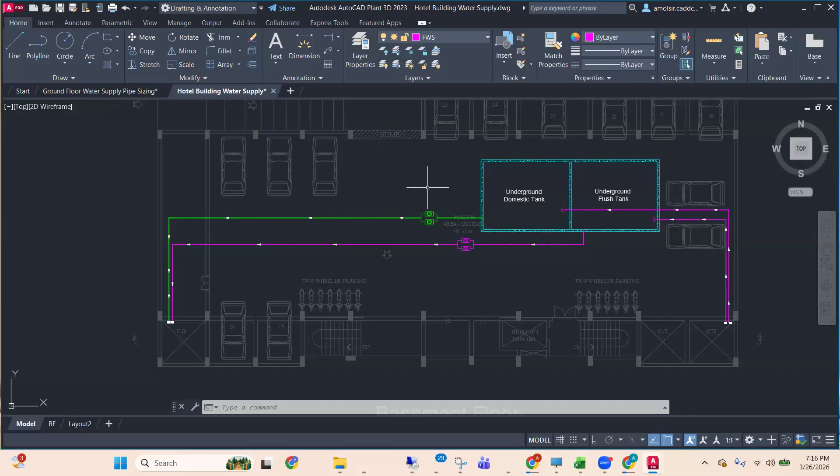Up to now, we have created an underground domestic tank, then an underground flush tank, and accordingly we have created the connections through them. You can see we have created the layers accordingly, like fresh water supply, then hot water supply. All layers were created, and this was already explained in recordings, but I'm giving a brief intro. Next, we have covered how we are able to attach the pumps, and we have also provided the direction of water, like how the water will be transferred. From the ground floor, the water will be coming from STP and municipal bore well, and accordingly it will be supplied.

At the basement, we have the underground domestic water tank and underground flush water tank. I have already shown you the sizes after the single line diagram, and mostly we have created the pipe sizing over here, like for the shower, we have seen 20 pipe sizing was created. We have created the piping accordingly. So instead of running all these systems, you have to create a system for flush water supply and accordingly for the remaining pattern. You have to create the pipe thicknesses accordingly and show the layers.

Someone asked how we are creating the pipe thickness over here. First of all, we have already created the line diagram. If you measure the distance, meaning the thickness of this pipe, it is 20 mm. So how are we creating a 20 pipe? Suppose this is a line I am having, I will take a straight line.

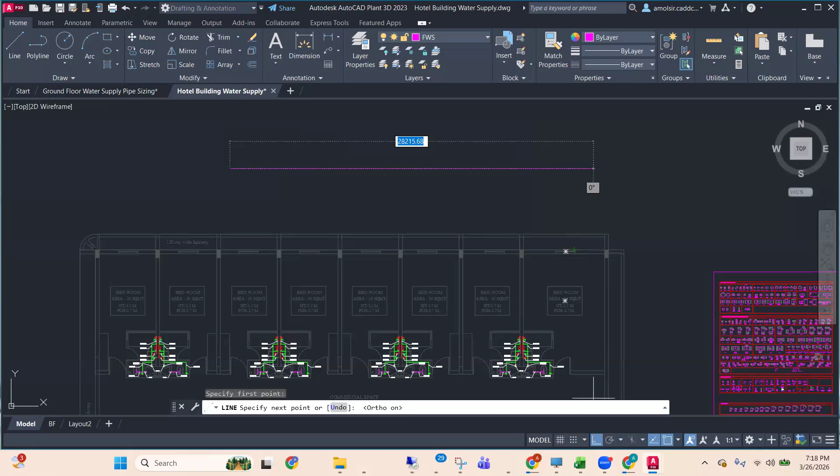I have to create a 20 thick pipe around it. Using the offset command, O enter, I will give 10 offset on this side and 10 on this side. So total 20 - if you measure the distance, it should show total 20.

So like this, you would be creating the pipe thicknesses, and here we have just placed the fixtures over there. We already had a list of fixtures, and I have already shown you how we can place the fixtures and what is the method of placing them. That we have already seen.

Same way, we have placed the shower system over here, and accordingly the valves were placed over here. That is the important step we're having, and you have to place the components accordingly here, doing the dimensioning accordingly.

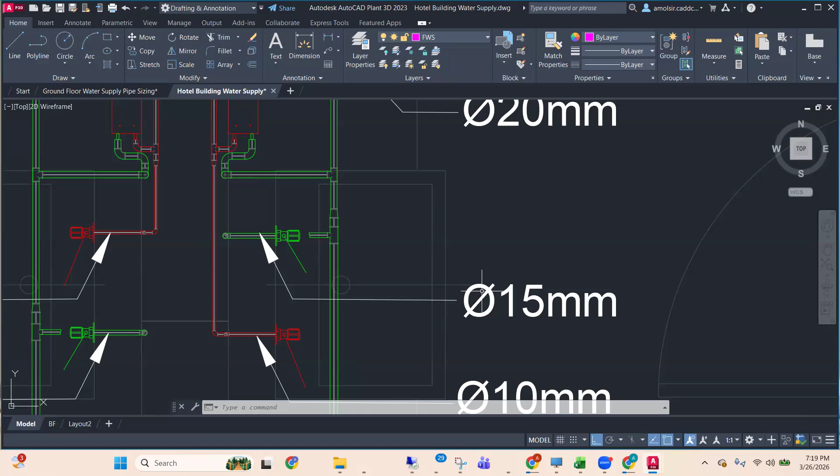Like suppose I am selecting this pipe, so what is the diameter for this pipe? The diameter is 15, this is the diameter symbol. You can just copy this symbol from the internet and paste it over here. Just Google it, copy the symbol and paste it here so that the symbol gets copied accordingly. Like this, a system of network you have to generate accordingly.

So this is the important part we are having over here, like how we are placing the components over here. Up to here, if anyone has any queries, please ask.

Yeah, hi, good evening. Sorry sir, I've just joined late. So you recall the last session? Yeah, anything new? I have just explained from the last session what we have covered over here.

We have created the basement section over here. We have started already from basement, then ground floor. Then the water supply lines will be shown, municipality borewell. Then accordingly you can see it's going to bottom, and it is the thickness of pipe that we are showing over here. This is the picture that we are showing for placement.

So this is a block we are having. You can see a list of blocks I have already given. All the blocks have been given over here with their dimensions. This has already been shared with you.

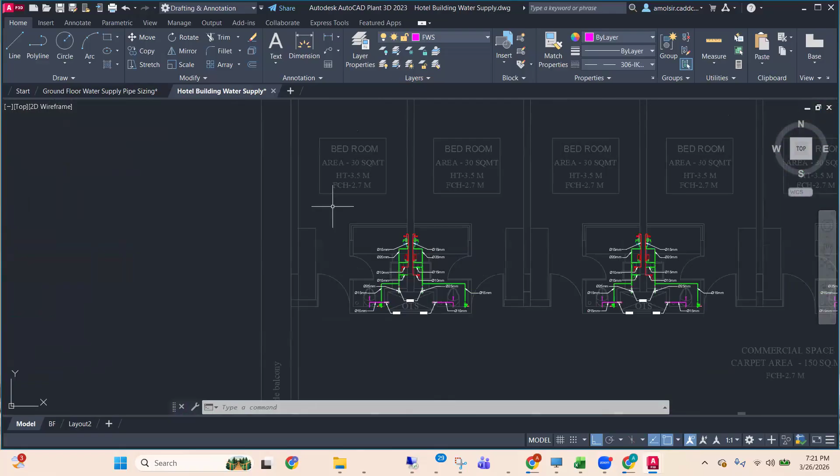So likewise, we have created in the previous session - we moved on to a particular room. In this room we place the shower, then we created the connection for the shower accordingly. This is going to the ceiling. Then we are having the heater over here. Then from the heater, the pipe connections will be going to the sink. In this sink, we are having hot water, cold water supply on the line over here. And then again the water supply line will be going to the cold water basins over here.

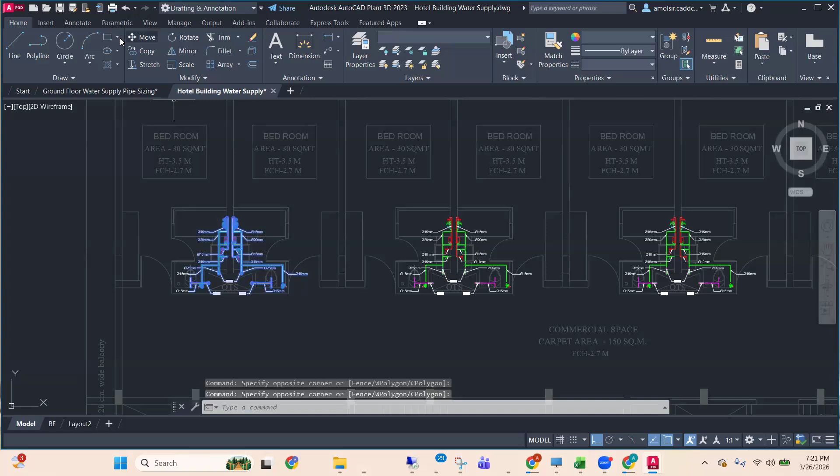Then we copied all this system. We created a mirror of this so that a mirror will be created on the right side. Same way, you can select all the components that are required. Like suppose I require these components, you just copy a corner point and paste it over here, so it will get pasted everywhere. So copy paste we have done for the similar kind of thing. If you are having similar kind of few rooms, then it will be placed accordingly over here.

So now you can see over here, we have already created a system. Same way, we moved on to this system. We created a pipe network over here. This symbol, if you see, this is the cut symbol, meaning the pipe is going cut over here - it is being cut over here.

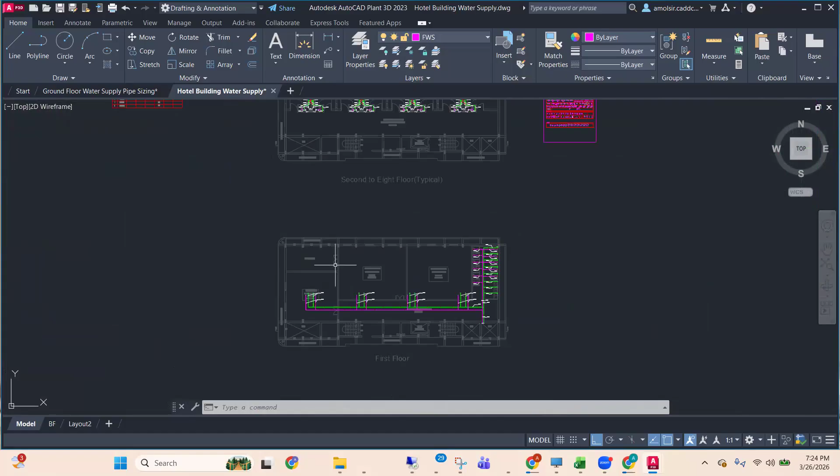Same way, this is fresh water supply, and hot water supply and cold water supply accordingly we are supplying over here. So domestic water supply, and accordingly different supplies are given over here. This symbol, if you see, this is for connection, holding over here. So it should be holding over here, it is not in air - you have to give some fixtures. So those fixture connections are given, and accordingly a line diagram like this was created.

Now, if anyone has any queries, please ask. Okay.

Sir, you use the poly command for creating the line? Yes, PL enter. Just a quick revision - for creation of pipe, mostly you are using polyline, PL enter. Here, initially we provided the thickness of pipe. Suppose how much length or thickness you are providing - suppose I am giving a length over here.

Suppose this is the pipe I am creating. Now for this pipe, suppose you want to give 15mm diameter. If you measure it, distance, diameter, you can see the diameter is 15mm. So simply what I will do, I will take offset command, O enter. 15 ka half you have to take, like 7.5 enter - 7.5 this side, 7.5 this side. Same way I have to repeat 15 ka half over here. So you can see it has been created.

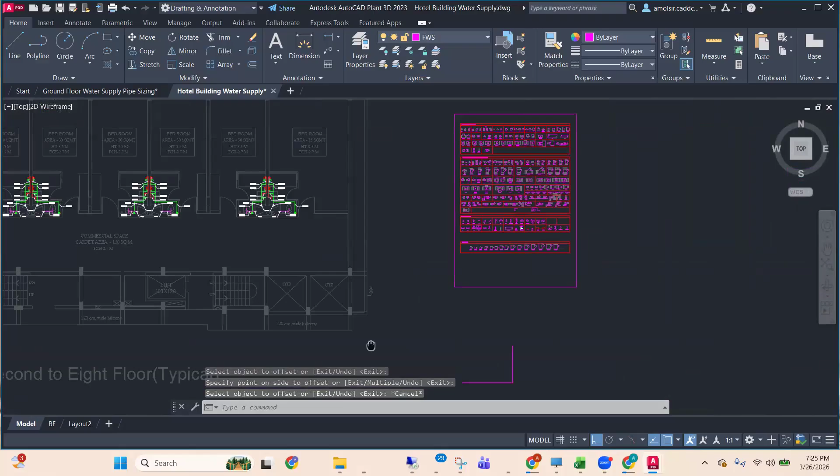Now I have to place a picture over it. Picture means, like suppose if this 15 we are taking, so it's 15, I have to place this picture. Just copy this picture - list of all the fixtures copy has been given to you. So suppose I am placing it over here. You can mirror it accordingly.

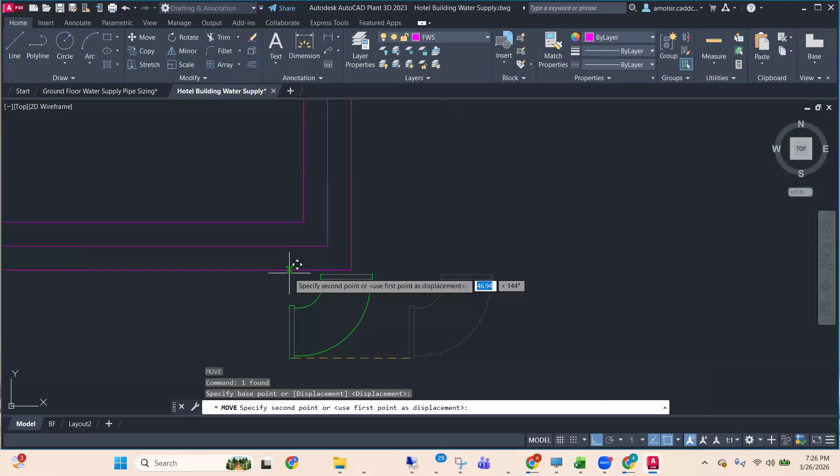Auto command can be switched on, erase source only, and now you can place it. M enter, move enter - from which point to which point you have to select accordingly. For this, auto command can be switched on, and now you can see the family can be placed like this. If you want to place it perfect, just mention the midpoint over here, so midpoint has to be matched.

And then later on, you can trim the line. TR enter - like this line, I will trim. This line, I will trim. This trim, this trim, so the extra line will be trimmed. Just trim the extra part that is not required. And now you can see a connection like that can be created.

I hope that's clear to you. Sir, this is how the drainage - this is the drainage line? Yes, yes, mostly we are creating a connection over here.

Okay, like how we are setting up the connection, that I am explaining for any time. Okay.

Since in last class, as I remember, you mentioned the polyline, which we have to use the thickness, which is coming as a thick line. Yes. But in this, we use only the line and take the offset of both sides as per the dia, right? Yes. Because whenever you get the pipe thickness, you have to show the pipe thickness, whatever pipe thickness you are getting. So you can show it, suppose if you want to show the 15mm dia or whatever dia you are receiving, that you have created accordingly. Clear? Okay, any other queries, please ask.

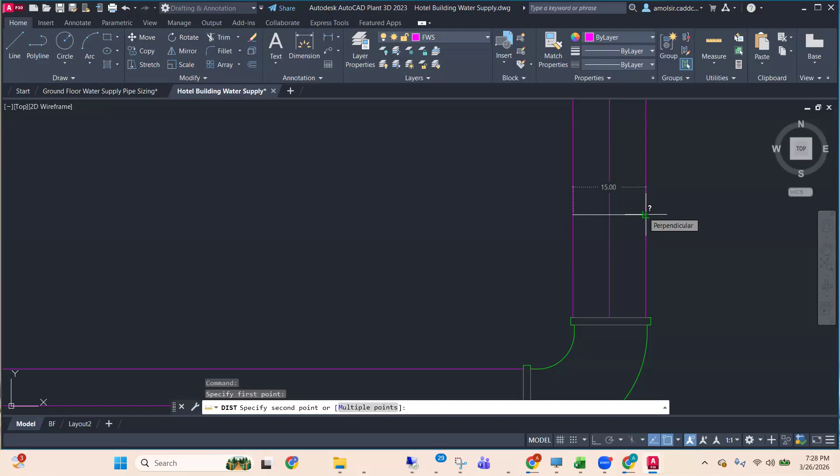So all connections that are required, that has been given in this, the whole list has been given. You can refer the name. If you want to measure the dia, you can press DI enter and measure accordingly, like what is the dia - that can be used. So that is easier for you because all of the connections have already been given over here. So the required connections that are desired at your end have been given over here. So there is no need for you to create the blocks. The blocks are already given to you, and this file has been already shared with you.

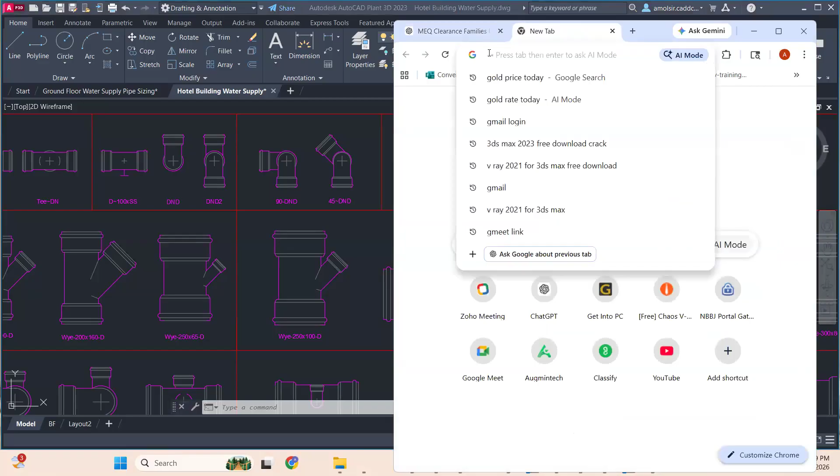Whenever you search on the internet, like plumbing fixture blocks, CAD blocks, you can see lots of CAD blocks are available. You can download them from it. If you are having company standard blocks at your end, the company that provides to you can use them also.

Okay, the blocks you can see can be divided. So these blocks are available, so you can download it from here also. These are CAD blocks. But sometimes the company does provide these blocks to you, so you can download them from your end also. I hope that's clear to you all. Anyone having any sort of query in this, please ask.

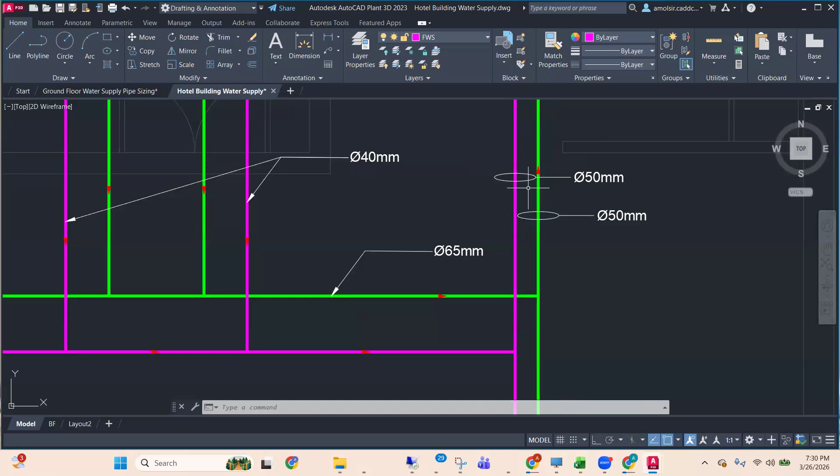Same way you can see, I have already provided the dimensions of pipelines over here accordingly. And you can set up the direction of flow, like you can see the arrow can be created. So for arrow creation, we have already seen PL line you can use. Okay, you can give the start point accordingly, and you can set the width over here. Like starting width, you can give 25 enter, ending width 0 enter, and you can see arrow like this.

Okay, like this you can create an arrow. So, sir, if the pipe dia is approx 25, we have to select offset of 12.5 at both sides toward the line? Yes, you have to take the size of 12.5 on both the sides. So it will get 25 added. Okay. Clear?

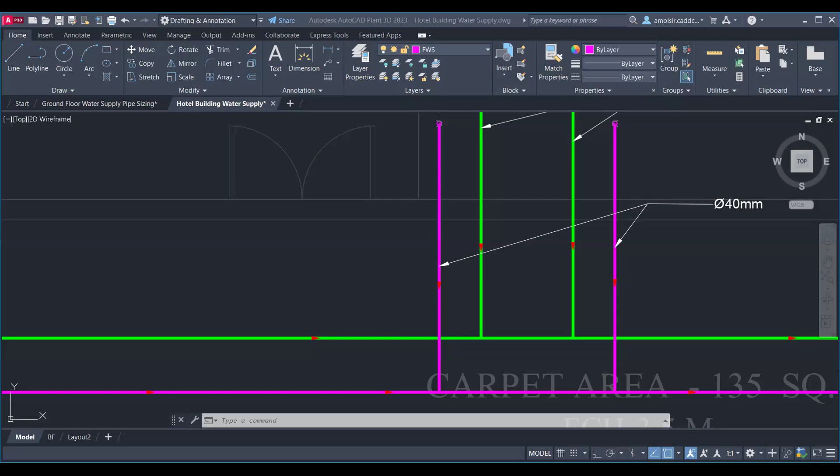You can see each and every pipe sizing. Initially we have drawn a single line system for you. This is the single line diagram. But later on, we have converted that single line diagram into a thick line diagram, meaning we are showing the pipe thicknesses accordingly. So if you want to show the pipe diameter over here, because we are fixing the fixtures over here, how you can fix the fixtures and how you can offset them, I have already explained. So you can do this over here.

Clear? Got it. So it will be useful for you to refer all these things because they are very important. If you refer to these points and place all these components in the diagram the way I have already shown you, then it will be easier for you to work with. Members, does that make sense? Yes. Correct. Now we will see the remaining part accordingly.

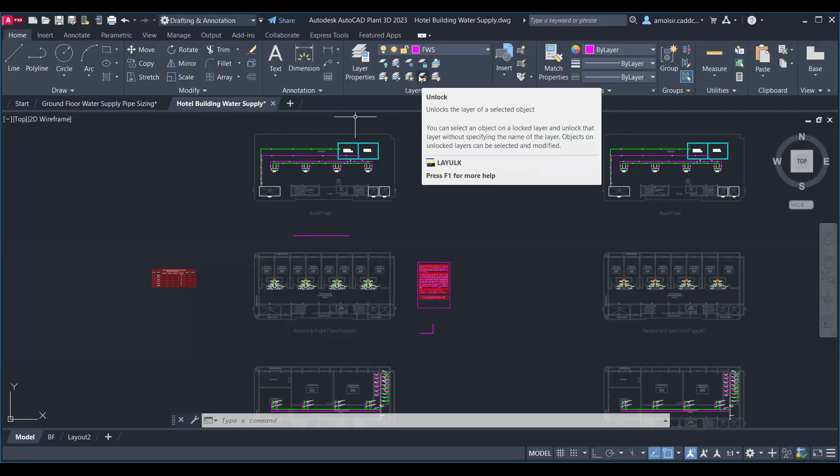Sir, one question: in the earlier line diagram, if we mention the thickness by taking the offset, are all three lines the same line or is one a dotted line? How do we represent it? You're saying all the three lines will be shown? Yeah, just like we take the center line and the 50 mm or 2-inch pipe, we take the offset of 25 on both sides. Now it is represented by three lines. So how do we distinguish, some dotted or all three the same?

You can see this white line is nothing but your center line. And these two lines are your pipe peripheries. If I measure the distance, this is the total diameter. We have to make the center line and side lines different colors? Center line will be in white color only, always. And these peripheries, you are creating them as layers. In the previous session I explained how to create the layers. So you can place layers like fresh water supply layers, and you can assign a color to it.

So it will denote the pipe thickness. Okay. So can we do the center line as a dotted line? Yeah, you can make it. Like suppose if I select the center line, here you can see you can select hidden line or like this line. You can make these changes like this, you're saying? Yeah, yeah. You can make it.

But that looks a weird or odd one. That's why we are keeping it as it is. We are not making it dotted. Got it. Okay. Got it. Yes.

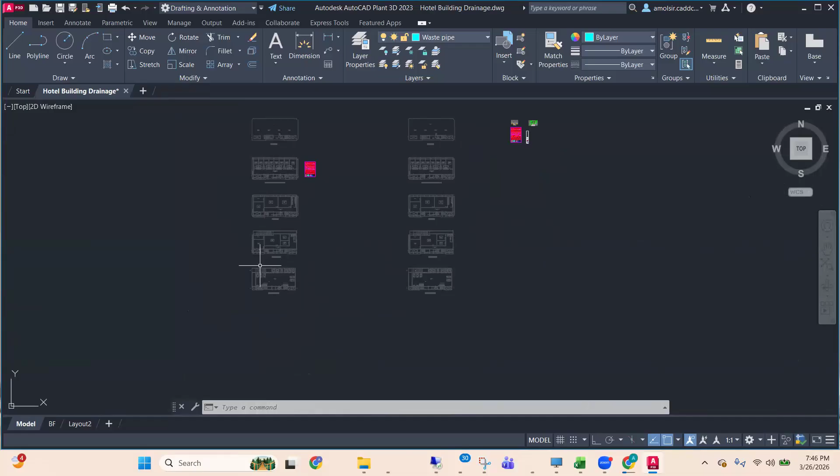Yes. Now in last session, I have already explained to you how to remove the extra materials from this layer. Okay. So we were having a hotel building over here. Same building we are going to take. We are going to update it with materials over here, and we are going to place the components accordingly. So for placing the components, mostly you will have to clean up the plan over here. Okay.

So even the domestic water, flush water, riser and flow, already we have created over here. So you can take the riser accordingly, and you can take the domestic water supply and flush water supply accordingly. So you would require the risers. For drainage systems, we would be creating the risers over here. If you don't know the risers, you would not be able to understand how you can place the drainage system. So simply, I will place all the risers over here.

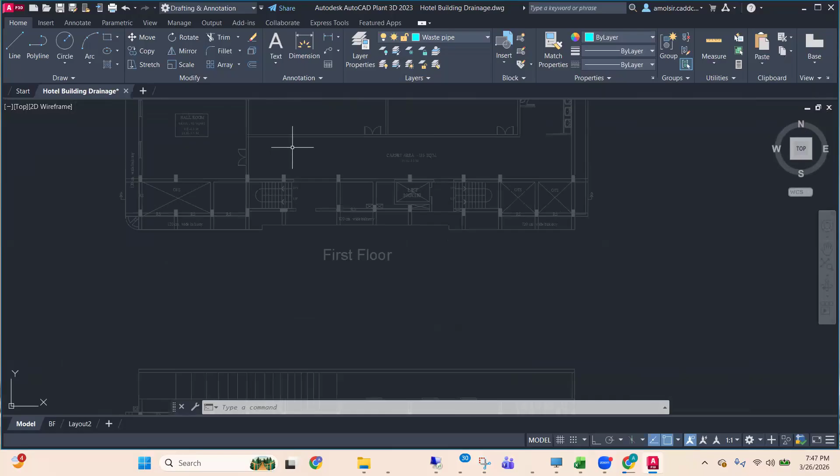So first of all, in drainage system, we are having the components over here. We are having the sink over here. Then you are having the bathroom area over here. Then again, we are having some of the components over here. So we are having floor drain components, and you can copy it accordingly. For copying the floor drain, suppose I am taking this one, copy it, CO, enter.

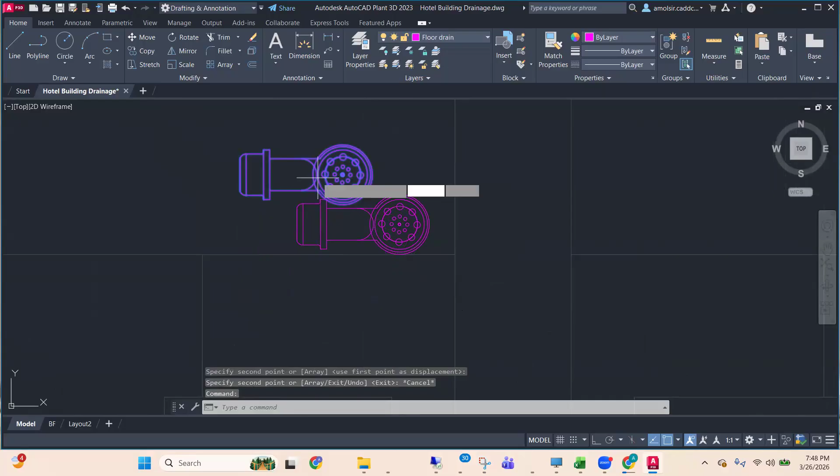For collecting the water from the floors in the bathroom, you would require to place the floor drain. So suppose I am placing it over here, like this. Normally you should place it in the corner. So I am using copy command, CO, enter over here. I will be placing the floor drain at the corner. Floor drain will be carrying all your waters from the floor, extra waters, it will be conveying accordingly.

Now this floor drain output, I will give it outside only. So you can rotate it, RO, enter. You can rotate it by like 45 degrees. You can set the point of rotation and see how you want to rotate. You can set it like this. You have to place it properly so that the connection comes properly outside. Even if you want to move it somewhere over here, that can be moved. A floor drain like this can be placed over here.

One more floor drain we require over here near the sink. So I can copy it over here. I can take the floor drain from the sink area and place it like this. So this is generally for your water output. If you are taking the water output over here, you can take it over. So one is for waste and one is for soil pipe.

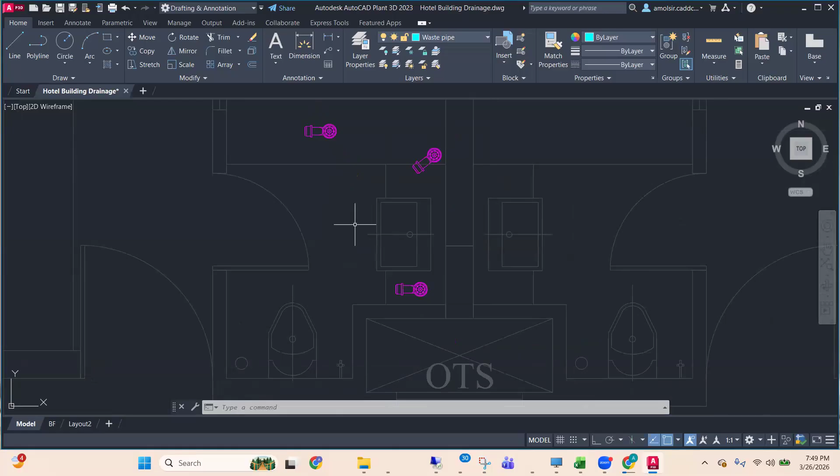Okay. So waste pipe means the water pipe which is coming from the floor drain or wash basin and all. That will be covering your waste pipe. And the wastewater which is coming from the water closet or urinals, that we call soil pipe. So two different pipe systems we will be placing over here. So simply you need to draw the single line diagram first.

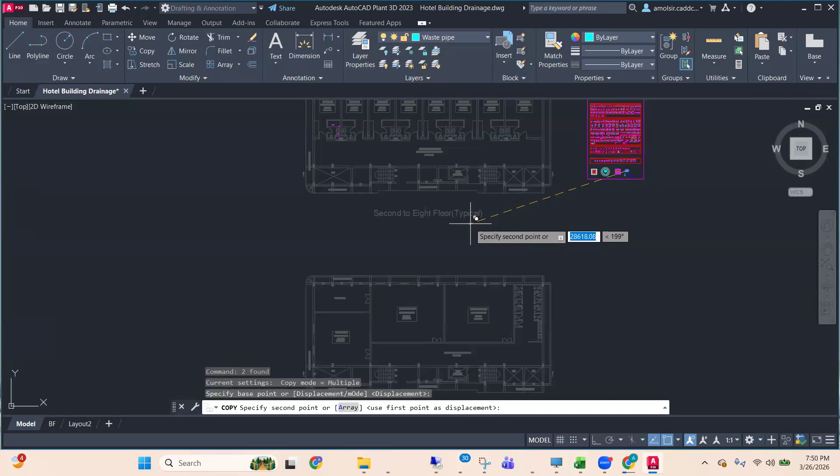Suppose I am using polyline, PL, over here. First of all, you need to place the risers over here. So for risers, I'm having the risers, both I'm taking with copy command. Okay. Copy. And suppose I'm taking the risers towards the OTS.

Now you know that we require a waste pipe riser, soil pipe riser, and vent pipe riser. So accordingly you can place the risers. First of all, rotate it. Suppose I will rotate it by 180 degrees. Now suppose one riser I am taking over here, copy it. You can copy from the center point, and suppose I take it in the OTS, open to sky, and place it over here. So this you can do.

You can place it at the corner point over here. So suppose you can take it over here. You can delete the extra part, whichever is not required over here. And the same way that can be designed over here. So this is for the wastewater riser. So you can name it accordingly and place the layer.

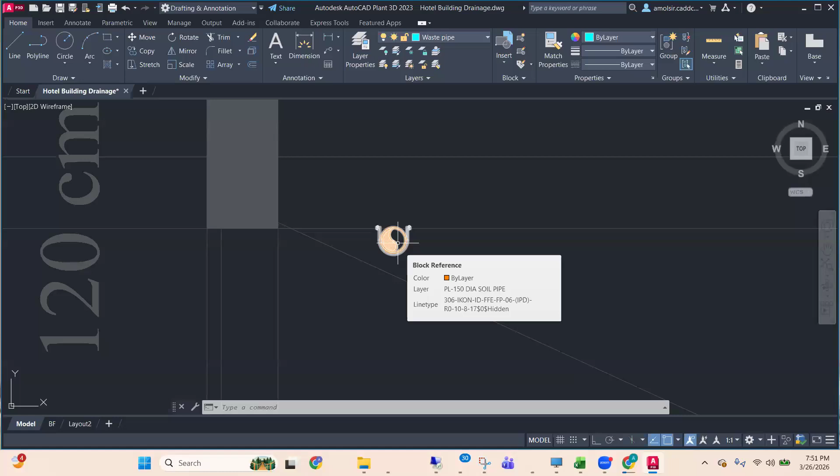Same way, suppose I am using the short pipe also, and I am giving it as the vent pipe riser. So you can copy this pipe accordingly. Suppose I am taking it from here, copy, CO, enter for copy. You can copy it from this pipe. And beside this, I am giving the vent pipe riser. So one is the waste pipe riser and one is the vent pipe riser.

Placement is important. You have to place it properly so that it will not get affected. You can see every section and every detail has been given over here. So you can place it accordingly. This is the way, and you can place it over here.

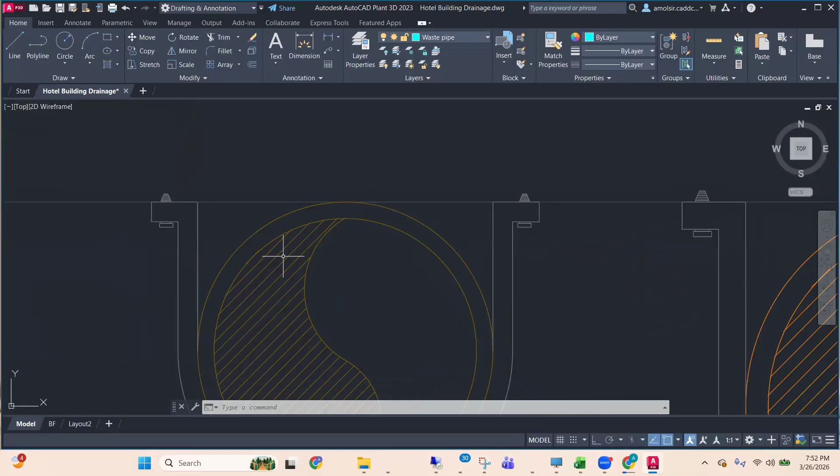Same way, if you require a soil pipe riser, again I would take a pipe over here. You can copy it, and suppose I will be creating a soil pipe riser. You can rotate it for the soil pipe riser. Suppose I take the rotate command. You can rotate it by 90 degrees and then place it properly. M, enter, move it, place it from here to here. You can see now the soil pipe riser also.

They should be placed closer so that the connection is made properly. So you can make the placement a little bit closer. Even these pipes you can move a little bit closer from this end. You can switch on the ortho command and place it at this end. Like this, we can do the placement of the risers. Up to here, is it clear to everyone? Yes, we are clear.

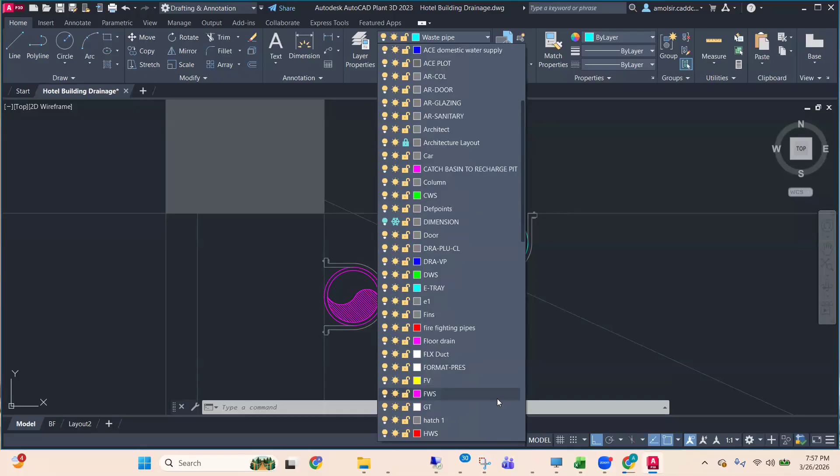Now for creation of the waste line, we will be using the polyline command. You can take any layer from here because we will be creating the single line diagram over here. Okay. So this is my main pipe over here. So you can take the sizing accordingly. So I'll take PL line.

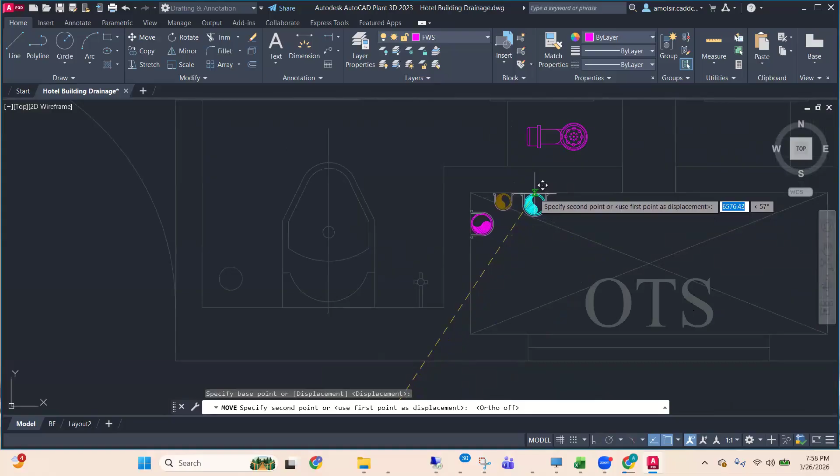Okay. Now the polyline should be... just a minute. We have made a mistake. The pipe, the vent, we do not have to connect it over here. It should be closer to your systems, no? So I will be moving it from here. Suppose this OTS we have, because it should be closer to the OTS. So suppose I'm taking this OTS, take it like this. Same way, if you want to move this, this can also be moved.

So this is the way we are setting up the things over here. And same way, I'll be using a polyline over here for creation of a pipe. Now you can create the pipe, but you can see the pipe thickness is low. So specify the width, like suppose 25 enter, 25 enter, and now you can see the thickness can be set. So you can keep 25 over here. For creating a straight line, you have to use the ortho command. And simply you can create the main pipe like this.

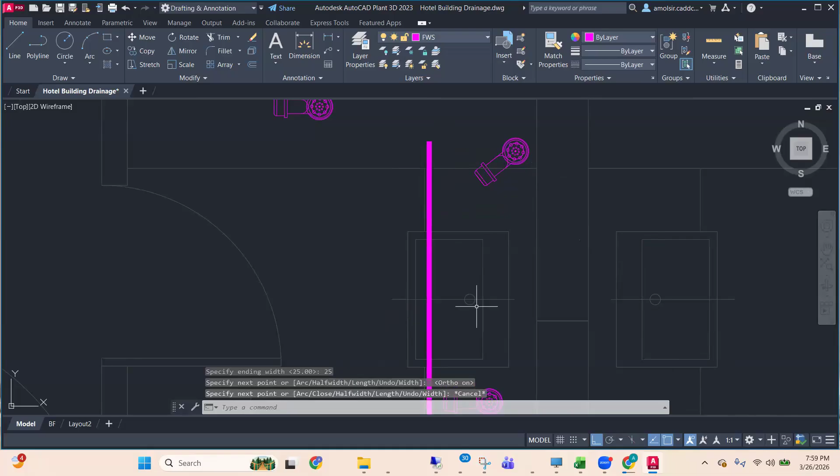Finally, if you remember, this is our wash basin, and here we are having a floor drain. We are placing it in the bathing area. This I will delete. So first I need to collect the water from the floor drain. So I will take the polyline PL, and with the shift key you have to enter less than 45. Enter. You can see the angle will automatically come out. Now you can see the pipeline will be coming automatically.

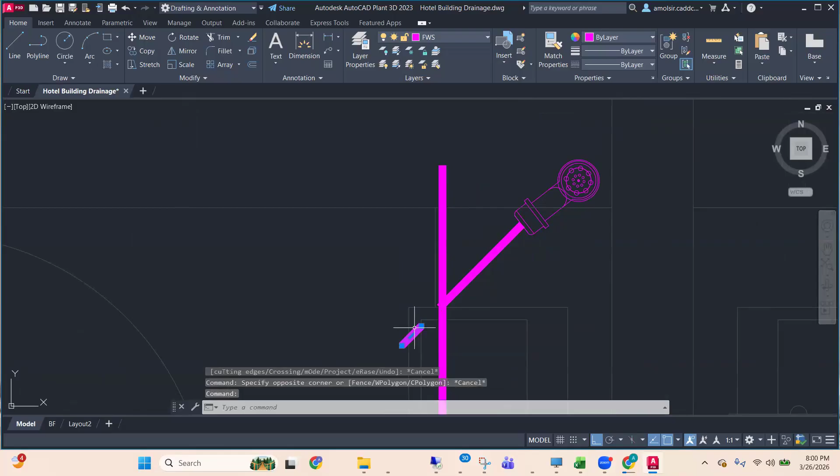Same way, if you want to trim the pipe, you can press TR enter, and this extra part can be trimmed. So this is the extra line that you have to trim. So the trim command can be used in that case, and you can see easily we are able to create the angled pipe.

Okay, so same way, from the wall we have to drop the pipe downwards. So I am again using PL line, and from this line you have to drop it down, and you have to draw a circle over here to show that the pipe is going downwards. So you can take the circle command and specify the circle radius or diameter. The circle can be shown like this. Then again, you can move the circle and show it downwards. Now you can see the polyline will be going downwards.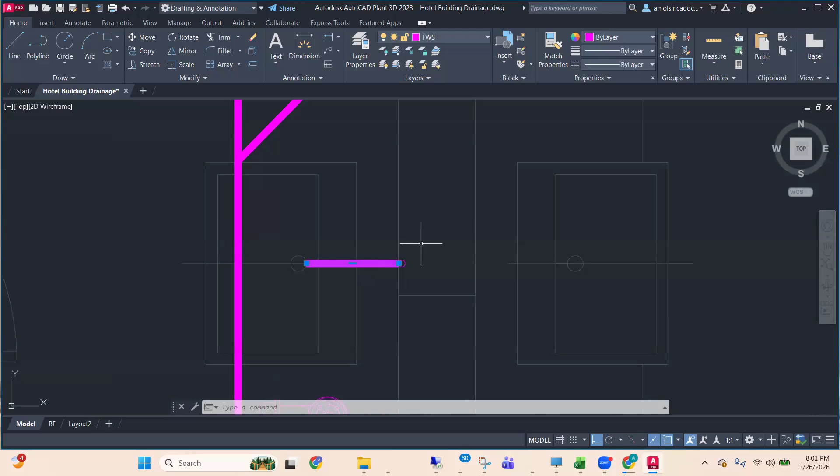So directly, we are not moving that water over here. First of all, we are collecting the water from the floor drain, then we will be moving it into the main line. So again, I will create a PL line over here, polyline. For giving an angled line, you can use the shift key. Okay. So first of all, for the floor drain, I am creating a pipeline over here straight like this.

And here you can connect the PL line from here, and now you can press shift key less than 45, and now the pipe system can be shown like this. This extra part you can trim or move backward. You can see the pipe network can be shown. So this is how you have to create a piping system. It will be very helpful for you to move on with the piping system in this way.

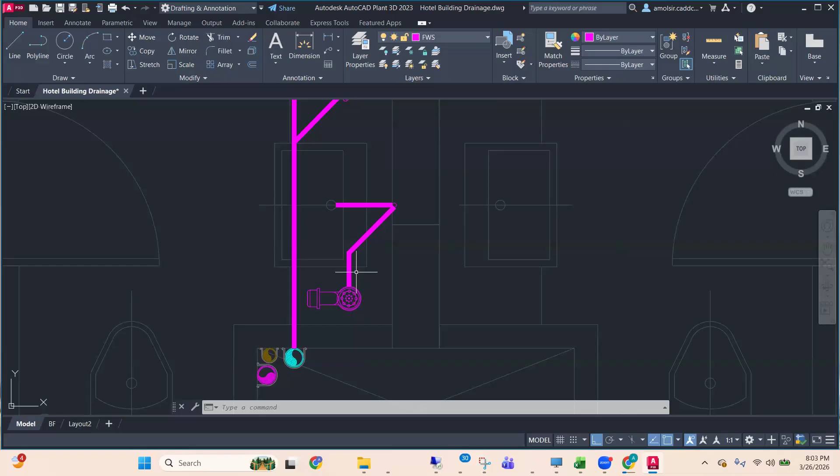So you have to be very careful when you are creating a piping network like this, and it will be easier for you to use the commands over here. Okay. Then again, you can use the polyline for other pipes over here, and you can see I can connect the pipe. Now again, you can use polyline, PL, enter. Again, you can press shift key, less than key, and enter.

So directly you can enter it over. Because this is a drainage system, it should be going in an angled way. Every time we prefer diagonal connections over here, not straight connections, for the drainage. So you have to maintain the slope and angle accordingly.

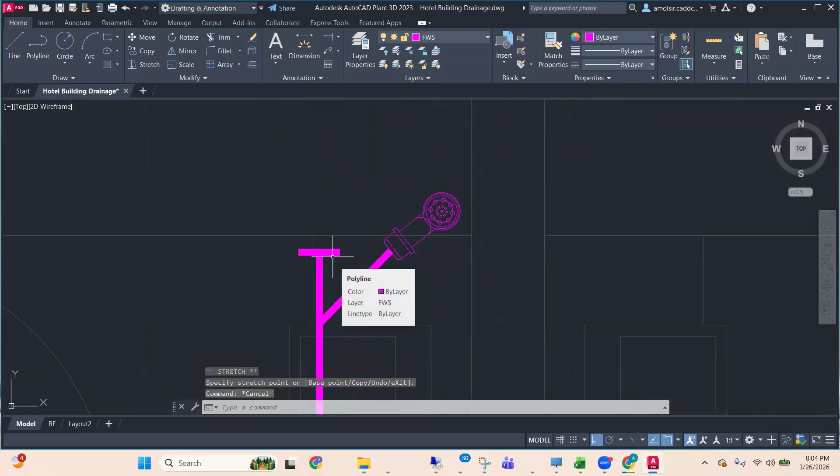Here, if you see, I have decided to place the component, so we can provide the clean out system. So you can use a PL line also and set up the clean out system. So sir, how can you rotate? See, we will be taking a common vent pipe over here for both waste pipe and soil pipe. So we are having a common vent.

So for the water closet, first of all, you have to ask the architecture to give the position value. In this positioning, they will be giving you the ledge wall. Then you will be creating the soil pipe, because without a ledge wall, you will not be able to create the soil pipe. So you should be able to create the ledge wall according to your plan, and creation of ledge wall is very much important. Somewhere here the architecture person will provide you the ledge wall, so you have to propose the ledge wall.

So can anyone tell me what is a ledge wall? Anyone? Don't know, sir. What is a ledge wall? Why are we using the shift key? Shift key we are using so that we get a proper diagonal order, angle order. So what is the use of a ledge wall? Can anyone explain? No idea.

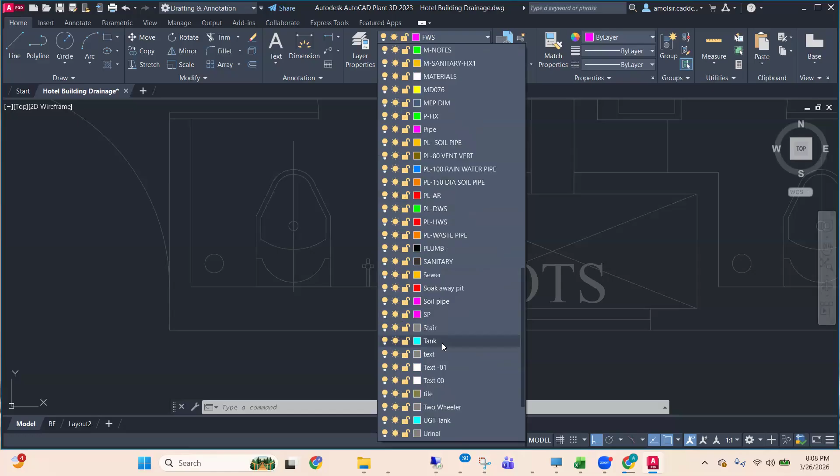Now you can take the ledge wall layer. So you have to propose a ledge wall accordingly. I think the layer is created. Any layer material you can take. In layer properties I created this; you can name it ledge wall. Suppose I propose a ledge wall over here, like this. You can fill this ledge wall with hatch material.

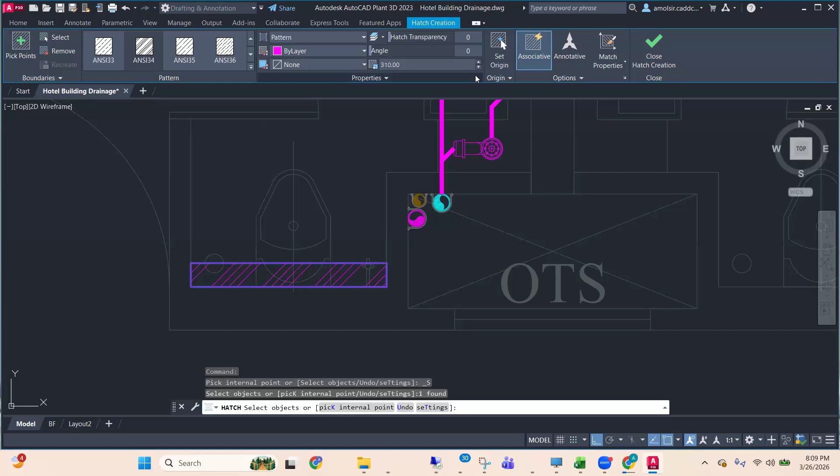For hatching, go to this section, take walls over here, and select the wall layer. Most of the layers are given; you can take any one of them. Hit select and select the object. You need to increase the scale to give proper sizing. Now you can see the ledge wall layer is created. You can increase the sizing, give the proper size, and press finish.

And you can rename it. For naming, I will give the leader, LE enter. Suppose this is my ledge wall. For text, TX enter. You can create a small box for your text, or take multi-line text from here, and rename the object accordingly. The name can be given here. So now here I will write ledge wall.

150 I'm taking. Select the text, and if you want to increase the text size, suppose I am taking 2 enter and press use.

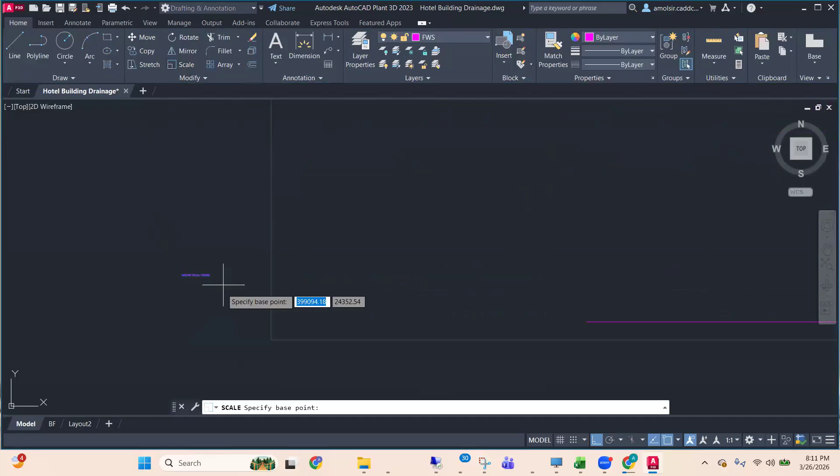Again, still it is small. You can raise the scale also, like scale it how much you want and move it up and enter.

So like this, you can see we are creating the ledge. I hope up to here everything is clear to all. Anyone having any doubts, please ask.

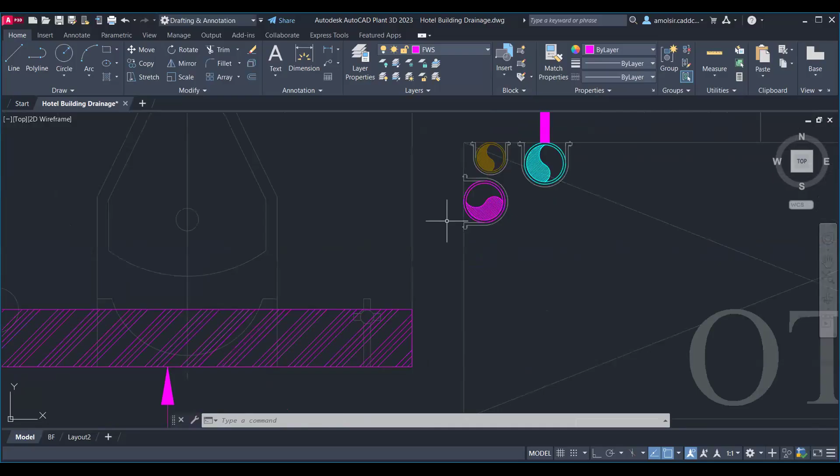I hope you're getting it. Can you repeat? See, it is the vent that is common in between these two pipes. The wastewater pipe is collecting water from your sinks, or we can say floor drains.

Okay, okay. I understand that the WC is the sewage line and the flushing line, and the normal wastewater line is different, which we can put in layers. But my question is that we are giving the supply water line and the drainage line in the same picture, or do we have to put up different drawings?

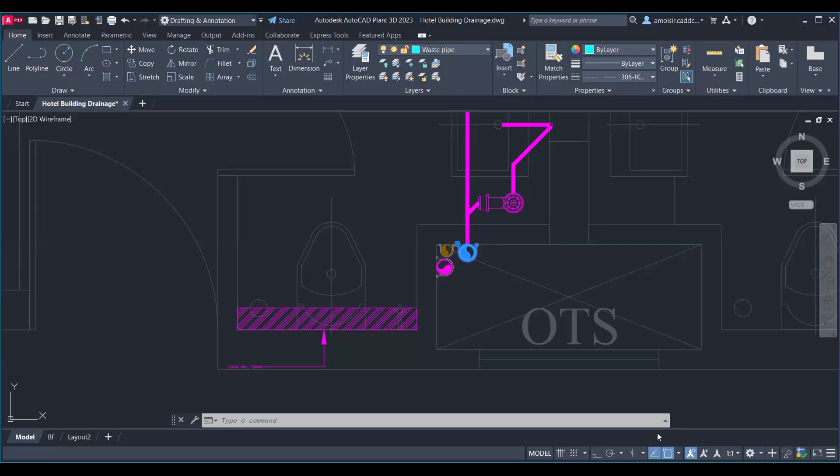You're audible. I'm asking, should we show the drainage line and the supply line in the same drawing, or do we have to maintain different drawings for the drainage system and the supply water line? No, no, no, this is separate, this drawing we are creating. This is the drainage system we are creating. So drainage system and supply system, you should show them separately, not in a single drawing.

Okay, okay, okay. The supply drawing I had already explained to you previously. This is the new drawing that I have taken for the drainage system, so this is separate. So we can't use the same drawing for the supply and drainage? No, no, you don't have to use it, you have to use separate drawings.

And sir, for the wash basin, you have mentioned this zigzag. What is the meaning of this? Can we take it directly as zigzag? No, zigzag means you have to maintain a slope particularly. A particular slope can be maintained over here, so that you have to show it accordingly.

Okay, below the wash basin line. Below the wash basin line. Yes, this line, is this the one you're saying? This one here, this is going to the shaft, then coming back like this.

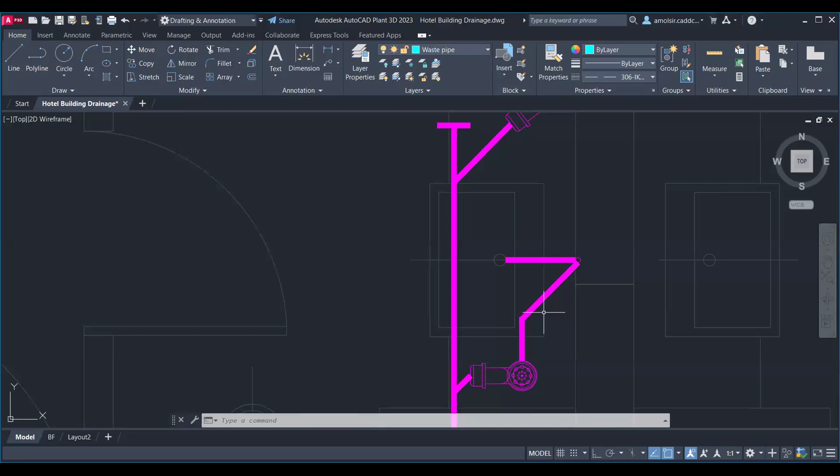Yes, yes, yes, what is it? Actually, it means that I have not directly connected this to the main line over here because it is coming from the bottom line. Okay, so the wash basin will also have the wastewater output, no? Okay, so it is showing just like it is the water trap. Yes, correct, correct, you're correct.

Okay, I hope that is clear to you now. Yes, yes. Fine, now next, as we were proceeding with the sanitation, so here mostly in the sanitation, we are showing the line over here.

Now here we'll be creating a soil pipe, so I'll take the PL line, and mostly you will take the soil pipe. Soil pipe. Okay, you have to create a soil pipe element. You can change the color, suppose I take yellow, now I take soil pipe.

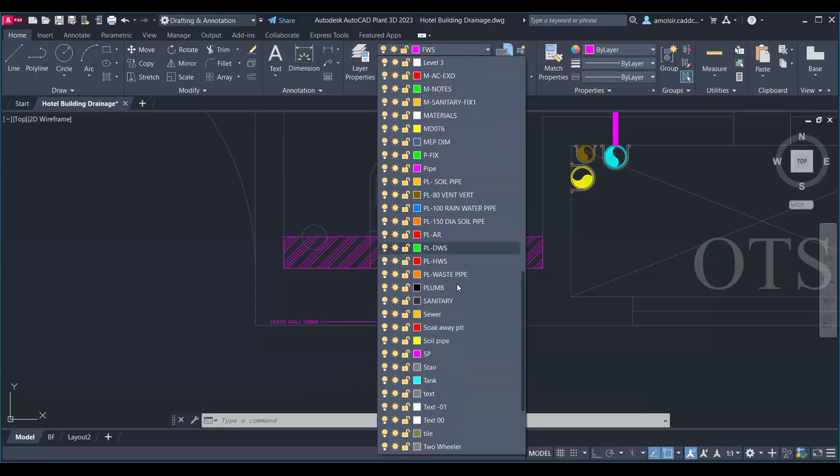You can use PL line, create the soil pipe section accordingly, from this input it will be shown. You can switch on the ortho command, and here it will be going in this wall, this ledge wall that we have created, so the ledge wall accordingly it will be created.

Now you can use a circle, and the circle like this can be shown. Let's show it up to the end point over here. So you can mention even the radius of your circle, and you can move it outwards. So you can use M enter and move it in here, so that it will be designating like it is going outwards. That thing you have to remember for your circle.

Same way, now next we have to create the exit over here, so you can create a drop pipe accordingly over here. Suppose I am drawing the pipe over here, PL line, you can draw it from here. Now, as I said, you have to mention the slope accordingly, it should not go straight. So you can use shift key, less than 45-degree, enter, and you can show the direction over here like this.

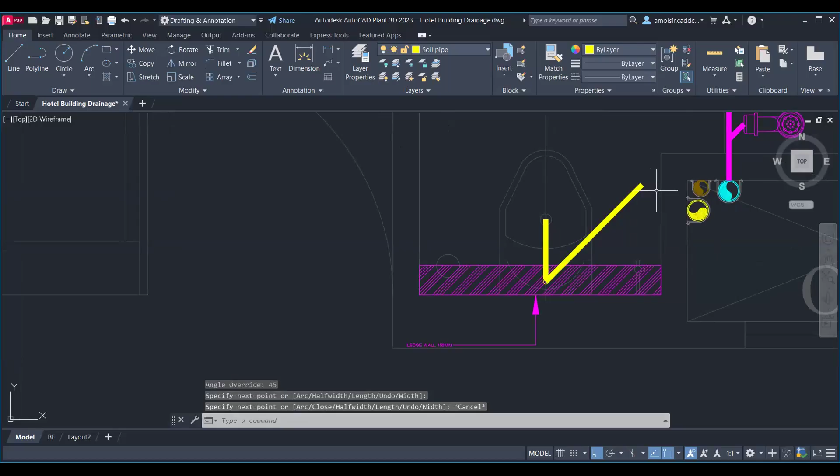Okay, you can create it up to here, and again PL line I will use. And this line can be trimmed, TR. So always the lines, they should go for a straight connection over here, and you have to maintain the slope over here like this. So this has to be maintained, accordingly this has to be checked over here. This one is important and you have to go for it, the slope has to be maintained over here.

Okay, same way now as we have created the sections, you can copy all these sections that we have created over here, so those can be easily copied over here. So that can be a different part, you have to just copy them. So for copying, what I will do, simply select the equipments, you can drag and select them, use mirror command, mirror command can be used from MI enter, and specify the base point.

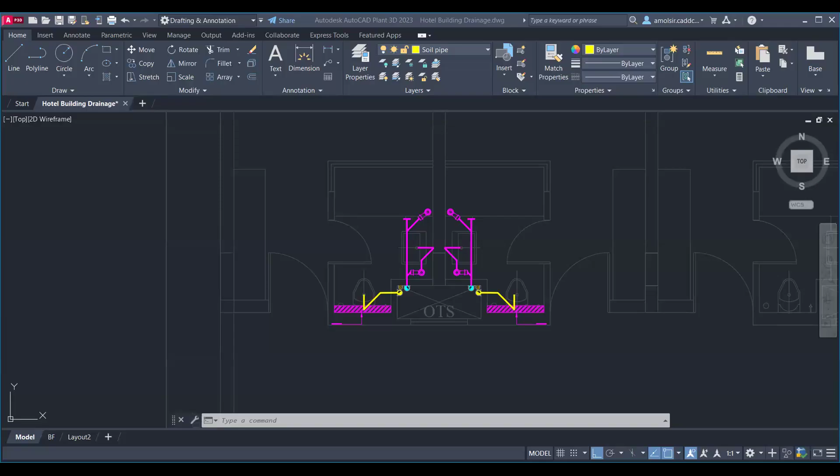So like this you can create the section, okay, and the same way that can be approved, okay. So I hope up to here everything is clear to everyone. Yes.

Next, after you copy, we have to draw the single line diagram. Same way, as you all know, these are all typical only. You can select the complete setup here and copy them. Same way, you can take the base point or OTS and place it like this. So any updates required from the 8th floor up to the 2nd floor - condition for the riser is satisfied, and accordingly you can create the system over here. So that can be created.

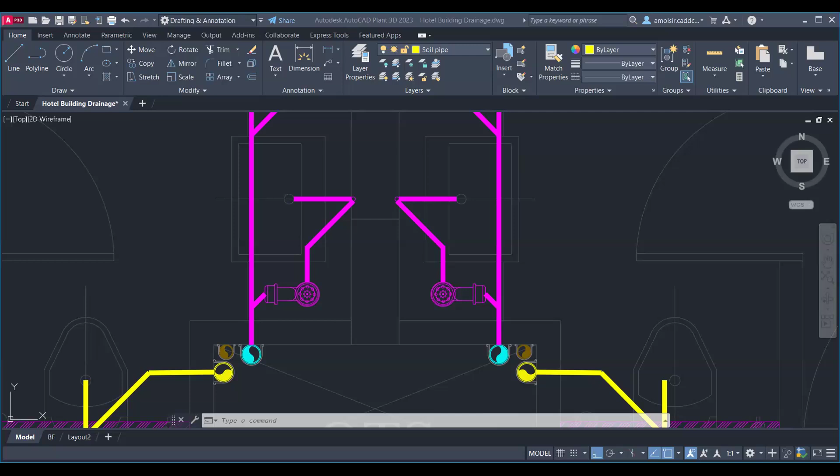So just as you were doing the pipe sizing for the plumbing supply line, the same way you have to do the pipe sizing for the drainage also. Everything will be the same, just the pipe sizing and connections, fixtures - they will be different.

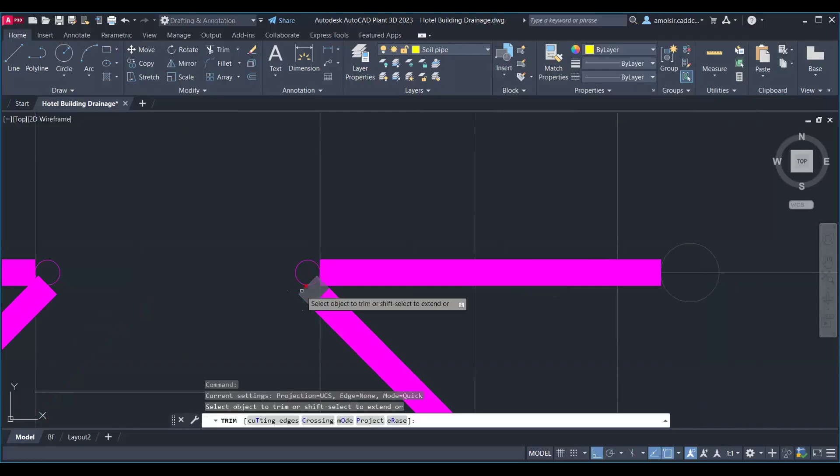So you can fillet it. Fillet command - press F, enter, and you can join it like this. Or you can just extend it a little bit manually. Manual extension is possible like this. Okay, we used the fillet command. Initially I used fillet, but if fillet is not working, then manually you have to place it. Extend - we have to extend manually. Yes, you have to extend it manually.

Okay. Yes, anyone else? Have you practiced?

Now next, we have to see the further pattern. So here, we have seen a provision for vent pipe. So why are we using the vent pipe? Can anyone say? Yes, why are we using the vent pipe? For bad smell extraction. For the additional extension. No, no, bad smell. For odor. Odor, bad smell. Okay, yes, that also. But what is the main problem? Why are we providing it? For the flow of the water.

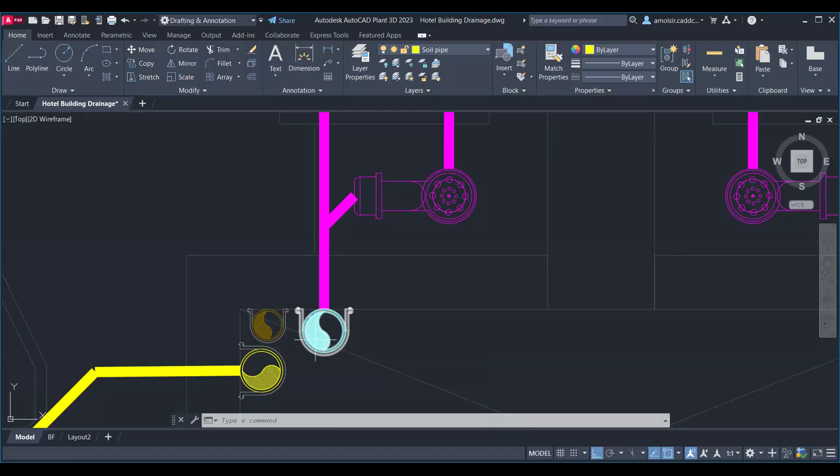Okay, let's see. Now here, you can use copy. You can copy the components accordingly. Suppose I'm taking the same components, you can copy them. You can take provisions like center points or other points as the point of the copy, and the same way the elements can be copied. First of all, for copy purpose, you have to align the elements wherever they are designed to be aligned. The same way, you have to repeat the procedure for other places also. The instructions have to be followed accordingly.

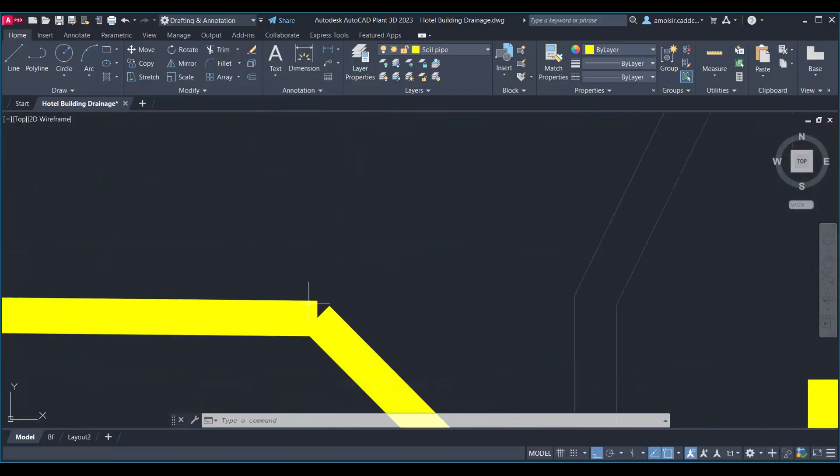And then again, same way as I created the pipe network here using shift 45 degrees, you have to use shift 45 degrees here. Wherever such a gap is coming, you can use fillet: F enter, select this line and this line. It will fillet and this will become a single line. So wherever such gaps are received, you can use F enter. Like here, F enter, first line, second line. Both lines will be joined accordingly.

Same way, you can give the bends accordingly, and you can give the soil pipe outline accordingly. And accordingly, I have to mention the outlets in the other rooms also. I hope that makes sense to everyone. If you have any doubts or queries, you can ask.

Same way, if you see, here we are having the hatch in the WC line. Why did you create that? This hatch you are saying? Yes. This is a ledge wall, no? Ledge wall, in which we can put the Geberit tank and flushing tank. Correct. So the architect has to provide the provision for the ledge wall. But how did you make it?

Simply, I created a layer for the ledge wall, and then you can take the rectangle. The ledge wall sizes are provided, so you can create a rectangle of that size here. And later on, I provided hatch inside. We have to make another layer for the hatching. Yes, another layer for the wall should be provided. Below, you can provide the name. Naming conventions can be done for the wall. That can be easily done.

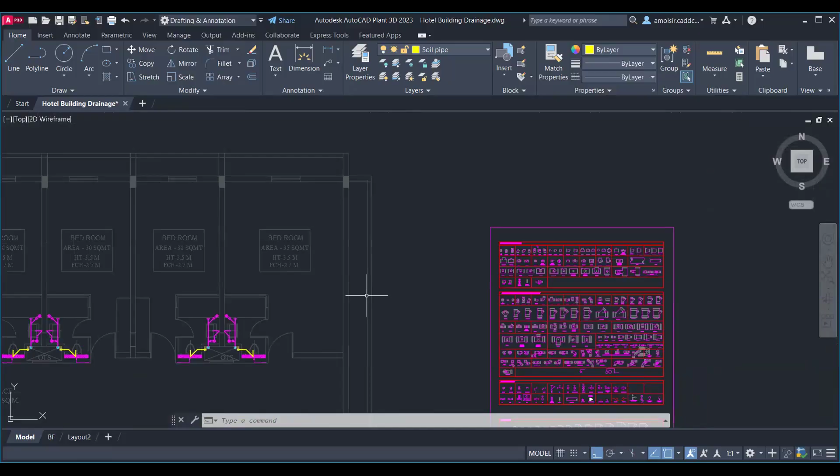Same way, you will have to provide the floor drain in each and every compartment present here. Suppose I'm taking a floor drain from here, you can copy it, set the base point, and then copy it from here to here. Like first, second, the position should be mentioned easily. Okay, I'm providing them. It should be like this.

Like this. Okay, so proper placement should be done and you can create copies of them as well. For creating them in a straight line, you can use the ortho command wherever desired. Like this. Same way, if you want to create a mirror of them, just select them. We have the mirror command, and you just select the center point and you can set the mirrored objects.

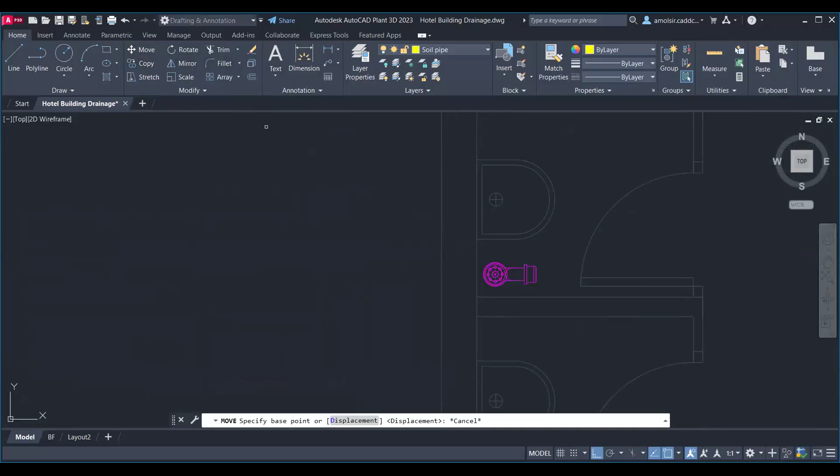Later on, you can change the positioning, or wherever you don't require them, you can delete them also, you can copy them. So that can be done easily. So this is how you can copy the components and you can place them in this way. That is possible. I hope that is clear to you all.

So the rest of the part that we have seen is similar. Okay, the components that we have placed, it will be in the similar fashion. Same way, if you see over here, you can be placing the components over here. So the components can be placed this way, and you can place the elements over here. Okay, same way, you can create a piping line over here, a single piping line.

So PL enter you can take, or you can create a pipe network. The pipe type can be selected. Like suppose if you are taking this pipe, the layer you can see is FWS. So PL enter. Same way I can take an FWS piping system and you can create a line.

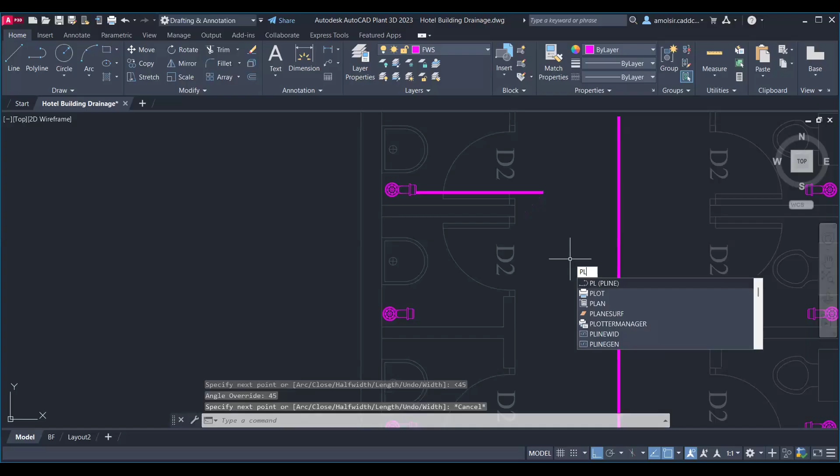Same way, the connections, they will not be straight. Okay, PL enter, they will come straight up to here, and shift less than key 45 enter. Okay, minus 45, sorry, you have to give minus 45. So again PL enter, shift less than key minus 45 enter, and you can enter minus 45. That can be connected over here. So same way you have to do the connection for other pipes also.

PL enter, connect it from here, then shift less than plus 45 on this, so that it can come down like this. And you can see the connections can be made like this. Same way, you have to do the same connections for other pipes also. So you can just select this one. Wherever possible, you can copy the piping system.

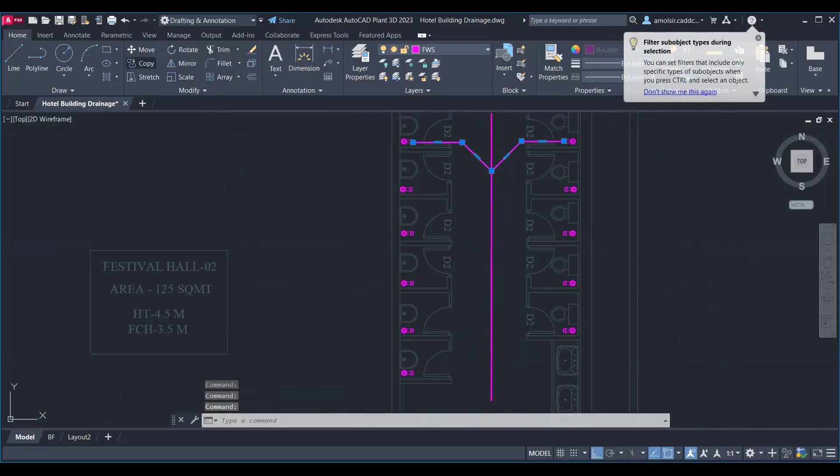Like suppose I use the copy command. If the position is same, then you can see they can be easily copied like this. If the position is same, then only you can do this. Otherwise, you have to manually place them. That is the best option. Okay, so using this, you can copy and place the elements like this. So in this way, you can see we have collected the wastewater.

So like this, you will have to create a network, and accordingly the piping network can be... Sir, I'm facing trouble. How can we create a hatch? Hatch, yeah. Suppose I have created a rectangle over here. So to provide the hatch, go to hatch. Here you can select the hatch pattern that you want to give. So simply select the pattern, and here click on the select command and select the object.

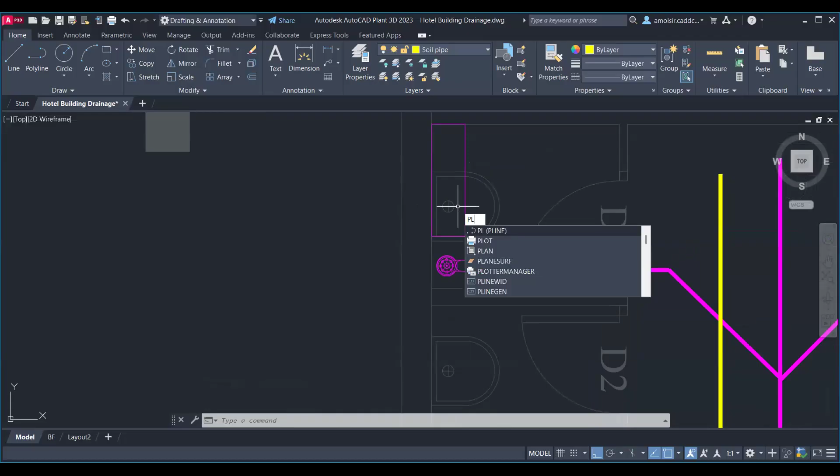And again, for the urinals, you would require to join the network accordingly. So same way, I will use PL enter. You can specify the connections accordingly here. And then you can specify shift key less than -45 so that it will come over here like this.

Same way from this also, you can take the connections for the soil pipe, PL enter. So you can specify the pipes coming over here and shift key less than 45 enter, and then it can be joined to the soil pipe like this. So this joining is to the soil pipe. Make sure you are joining it very carefully.

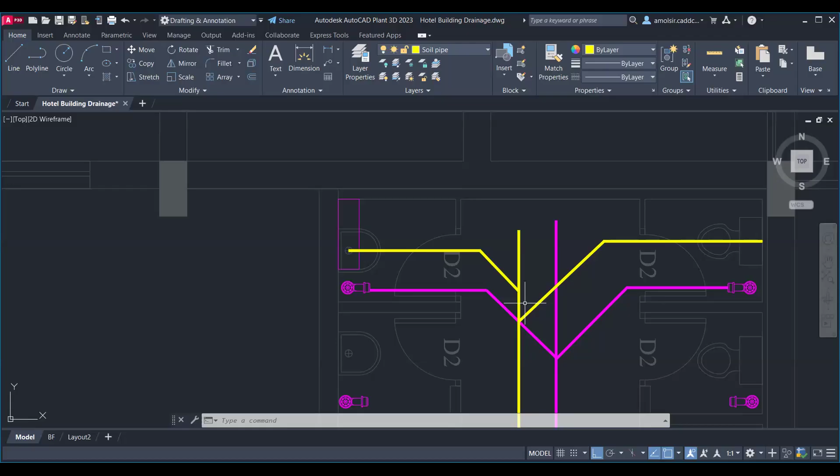So you have to be very careful whenever you are joining the connections. You don't have to get confused in this case. Every time you are creating the system, you have to create the system very properly. This is a complicated system. You can see it will become complicated everywhere. So properly you have to join the systems over there and give the outlets.

So here somewhere in the OTS, you will have to provide the drain outlets. So open to sky shafts can be used in that case. So like this, you can collect the water over here and it can be diverted over here. So the water can be diverted accordingly.

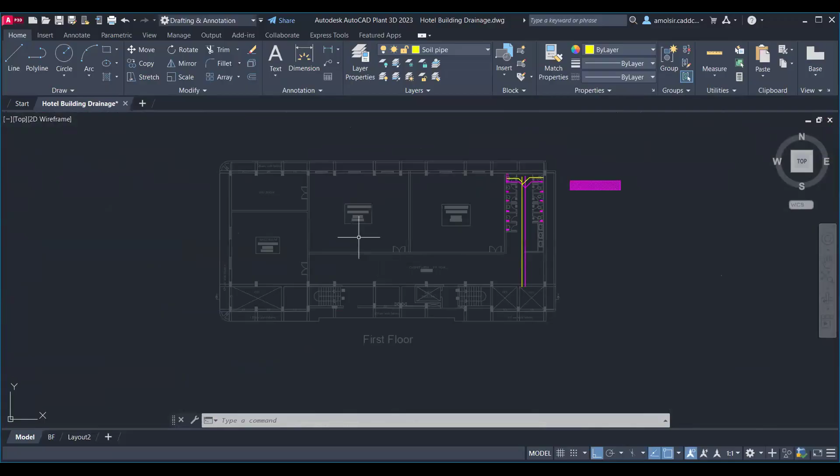Now, next, if you see the pipe that you are creating here, okay. Suppose our connections are done, every connection is done inside the system. Now the pipe will be coming outwards accordingly. Suppose it is going to the OTS here. Let's assume in this OTS also I am giving the connections to the soil pipe and drain pipe accordingly. As we have given the connections to the soil pipe and drain pipe, we have already created the soil pipe and drain pipe system in the OTS, you can see.

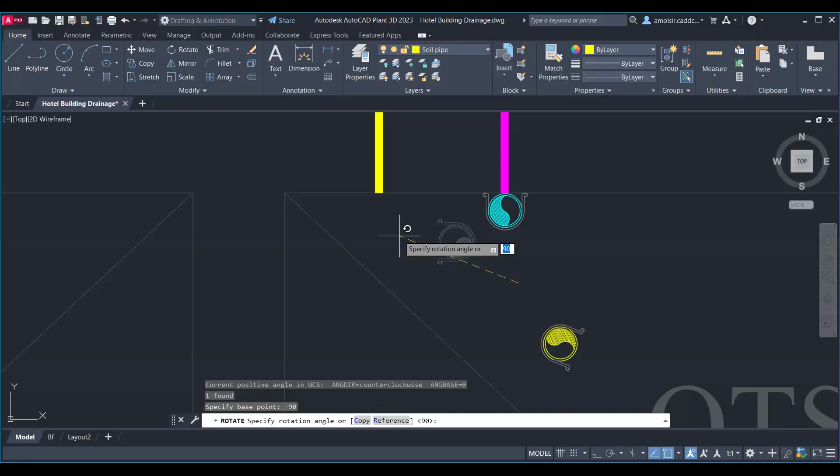So the same way I will copy this and, suppose, from here. So you can give the connections here. You can rotate it, so the rotate command can be used. You can rotate it by 90. You can even move it. So that is possible.

Next, whenever the pipes are coming down, you have to provide a gully trap system or GT system. So you can provide it outside somewhere. Let's say I assume it over here. So the connections will come outside from here to the gully trap system. You can switch on the ortho command and you can see the connections can be switched out like this. Same way for this pipe also, you can change the layer later on.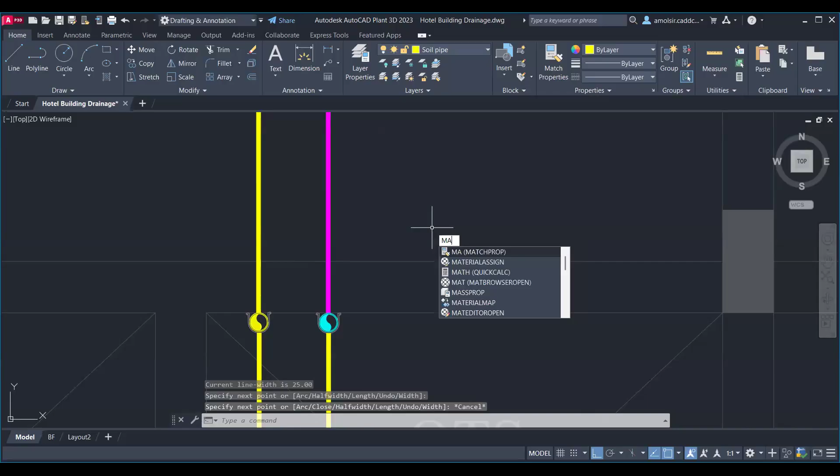For matching the layer, suppose I am creating a line like this, but at any instance of time I have to match the layer of this to this. You can type MA enter, the match command, this to this. So you can see the layer properties can be matched. If you want to match the properties of a line, the shortcut is MA enter. You can match the properties also.

So the wastewater, we have to collect it to the gully pipe system over here. If you discharge the water directly to the manhole, sorry, it will not come to the gully system. Only wastewater will come to the gully system. So the gully system we are providing for this. Then we will be having the IC system over here. You can copy it from here and you can place the inspection chamber. The size of the chamber and all these things will be provided to you by the manufacturer, and accordingly you can refer to the catalog.

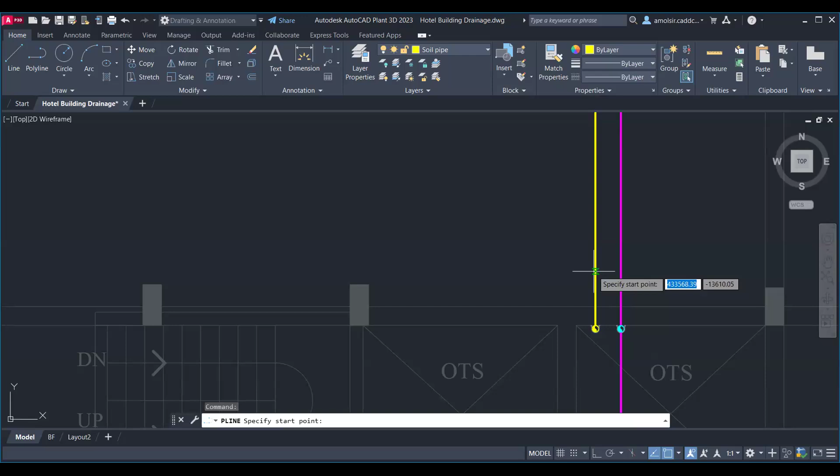Suppose I am creating an inspection chamber like this. You can use shift less-than key minus 45. It should be plus 45. PL enter. Shift less-than key plus 45. And the piping should be coming to the inspection chamber like this. So you can extend the pipeline inside the inspection chamber.

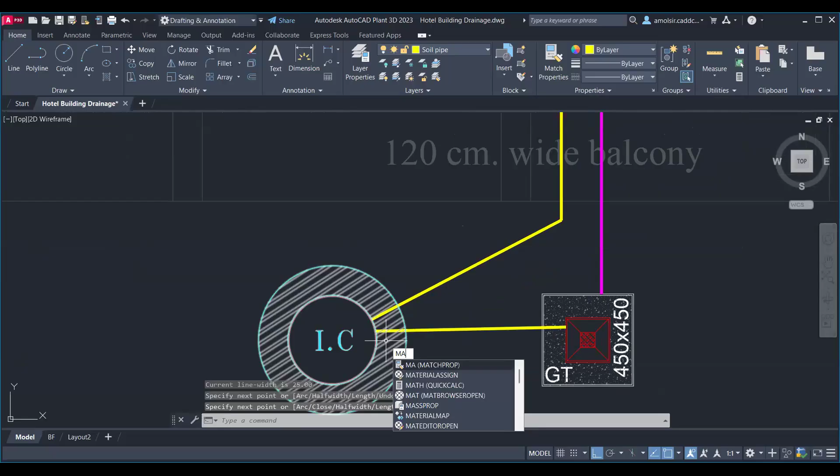And the same way, when the water is going from the gully system, you can use a polyline for the water from the gully system to the inspection chamber. Then you can use match properties, MA enter, this line to this line, so the properties can be matched. So you should know how we are creating the system. This should be easily understood. And the same way you can use the things over here for calculation purposes.

I hope up to here it is clear to everyone. No one is having any queries? If you have, please ask.

Sir, what is this GT? The gully system you mentioned, this rectangle type? The gully system is so you do not flow the wastewater directly into the inspection chamber, because the inspection chamber will have lots of odors and gases. So you do not connect that pipeline directly to your inspection chamber; you have to provide a gully system. The wastewater will come to the gully system, then it will move on to the IC chamber. Okay.

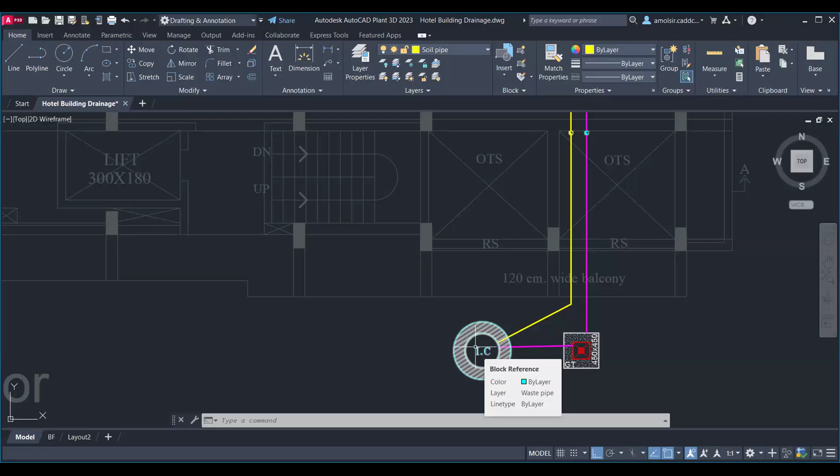And what is this IC chamber, sir? Inspection chamber. Like municipal lines, you are having drainage lines, so those drainage lines can be connected accordingly. We call them IC chambers. Meaning, sir, a municipal septic tank? No, no. Municipal drainage lines that carry the wastewater from the house, on those drainage lines. See, whenever you have a municipal drainage line like this, suppose the drainage pipe is going like this, you have an inspection circular chamber above it. Then again the pipeline will continue from here.

Then somewhere here again the inspection chamber. It's a lid opening for your chambers. So that is your inspection chamber opening, like this. So it's the top inspection chamber opening that we are showing. It is the junction point, we can say.

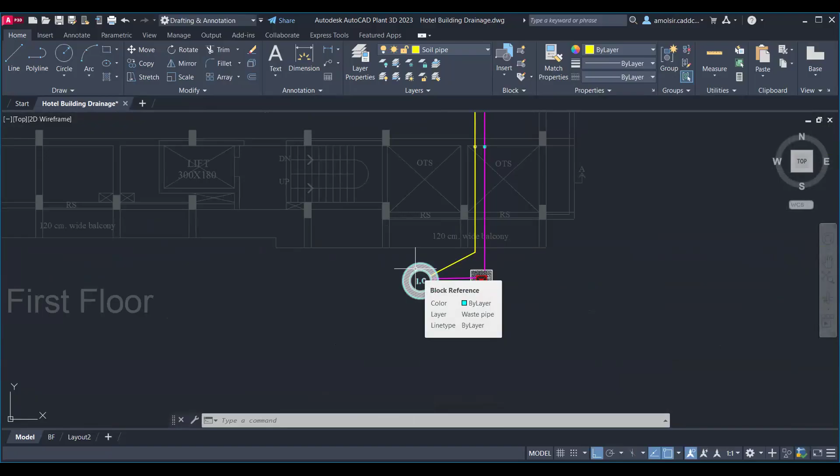Okay, sir. And one thing, sir, in this drawing you are using a floor drain? Yes, floor drain. For wash basin or for soil water? This is the floor drain, right, sir? Yeah. Floor drain, or you can say a trap that usually carries the waters, but we are using floor drain.

Rectangle type, square type, circular type. It's a circular type. Yes, a circular type, this type, and from it is the pipe connection. This is the pipe going below, and then the pipe network will be connected like this. Okay. This pipe connection is below the earth? Yeah, it's below the ground.

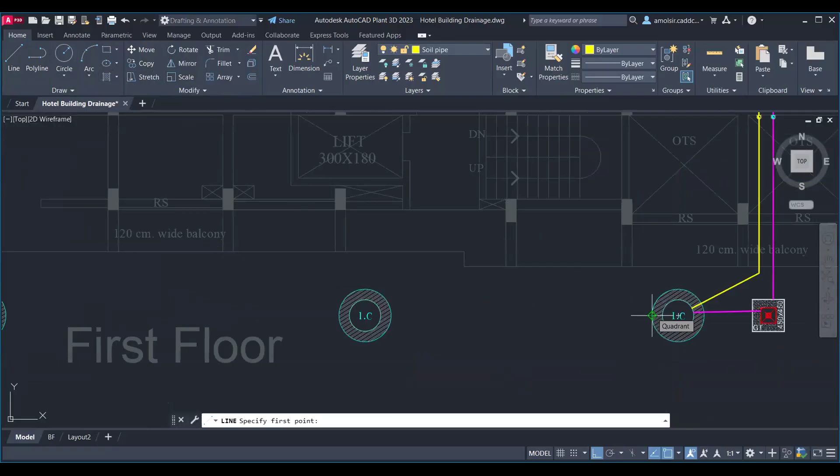Okay. So likewise, you can create lots of inspection chambers. Suppose you can give an interval of inspection chambers like this up to the final road, and you can connect it with the drainage lines. You can provide soil pipe only, but the pipe dimension that you're using will be higher for the inspection chamber.

Okay, so these will be short concrete pipes, also made up of other materials, for carrying the wastewater. So you can create those pipes. Then again, this inspection chamber may be connected to a septic tank. You can create a septic tank over here. Then the pipeline may be connected inside your septic tank.

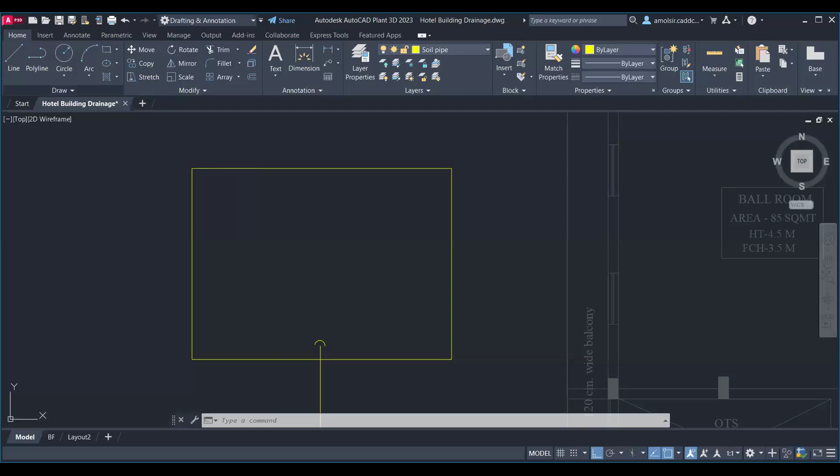So you can show arrows accordingly. You can assume that it is going downwards, so we can show downward flow accordingly, so that it is going downwards. So again, this septic tank, you can connect it to the municipal line. It will go to the municipal line. So if I provide the text over here, this will be your municipal line.

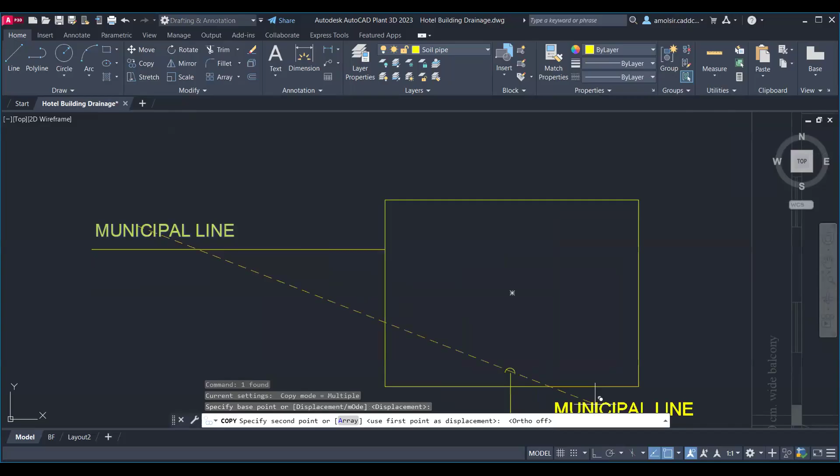You can raise the text size. Scale. Okay, and you can copy this text and rename it as septic tank. Like this. So you would need to create a septic tank.

Same way, you provide a soak away pit over here, for some debris or some extra waste materials. If you want to put it into that pit, you can provide a soak away debris pit also. You can copy the text from here and the soak away pit can also be provided here. So that can be created easily.

I hope up to here everyone is clear. No one is having any queries? Please ask.

So here we have already seen the sewer pipe sizing, how to place the sewer pipes, how to place the elements and how you can do the pipe connections. Other parts will be similar to your plumbing. Whatever you have created can be shown over here. Same thing. So we are done up to here.